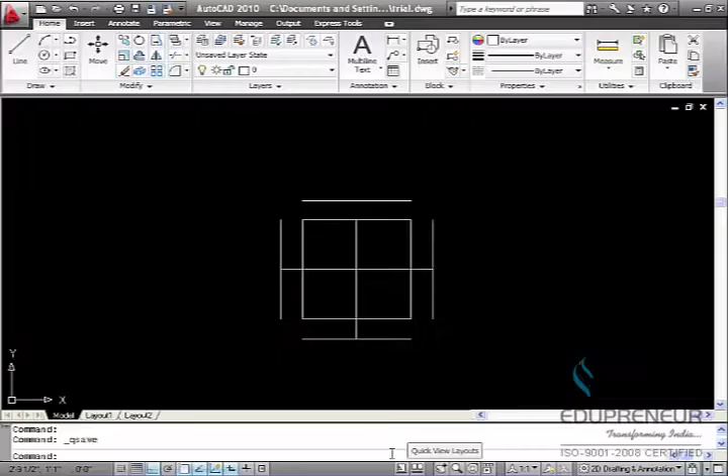Here we'll learn the next command, which is zoom. Zoom is located at the status bar in your AutoCAD window. When you click on zoom, this icon will display several options on the command window. They are all center, dynamic, extents and some others.

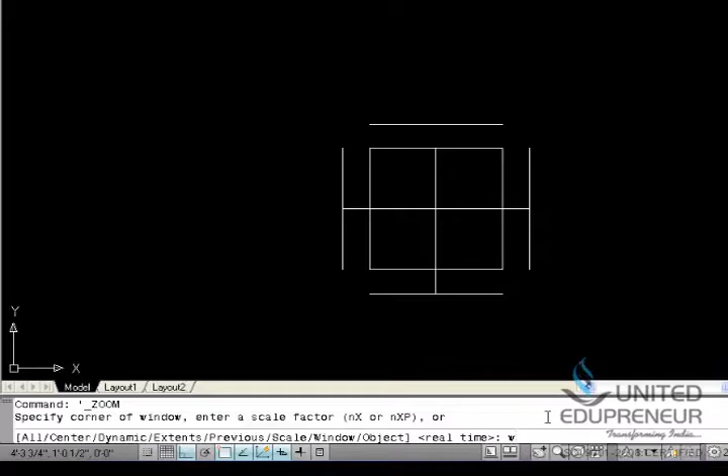Here for window we'll select W and then press enter. It will ask you to select the first corner of your object and then drag it throughout the object's end and then click. The window will get zoomed like this.

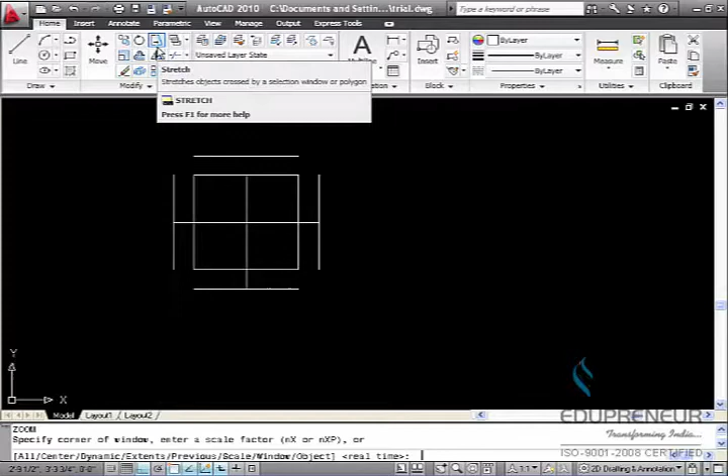We can set the command. We can also give the command Z for zoom, then W for the window, and then select the window by dragging over it. And it will get zoomed like this.

The next command that we will learn is pan. Pan is also located beside zoom on the status bar. This command lets you click in the window and will take the object anywhere you want, like this.

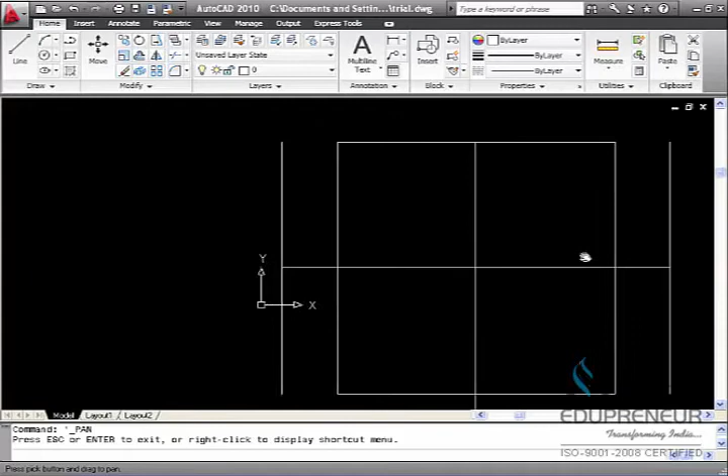We can do the same thing using scrolling on the window. And while you are using the pan command, click with the right mouse button to see this menu. This can be done, as I've said, through the window scroll bars too.

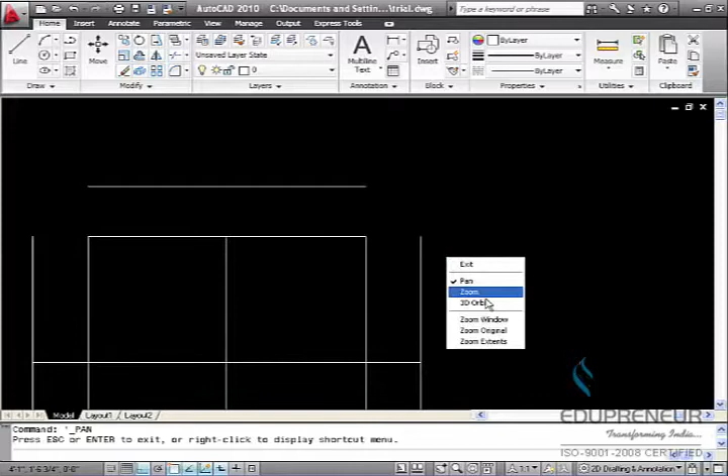I have clicked on zoom original. The same way I can click on zoom window too, and by clicking on exit will exit from this view.

The next command that we will learn in this tutorial is explode. That will explode the selected object.

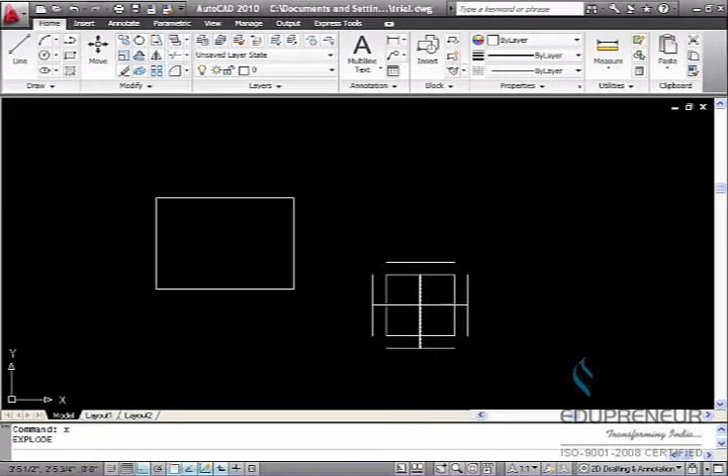If you have created a rectangle or a polyline object and you want to explode it, then you can use the X command, press enter. It will ask you to select the object and press enter. And as you can see, all the lines are separated from each other.

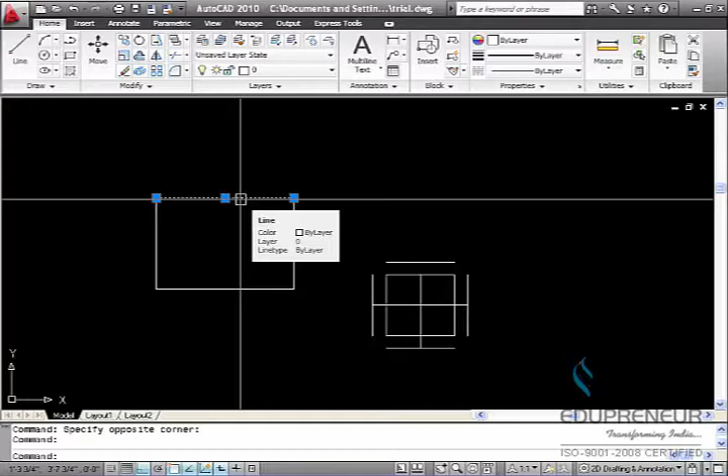We have seen zoom tool, pan tool and explode in this tutorial. We'll learn some more commands in our next tutorial. Thank you.

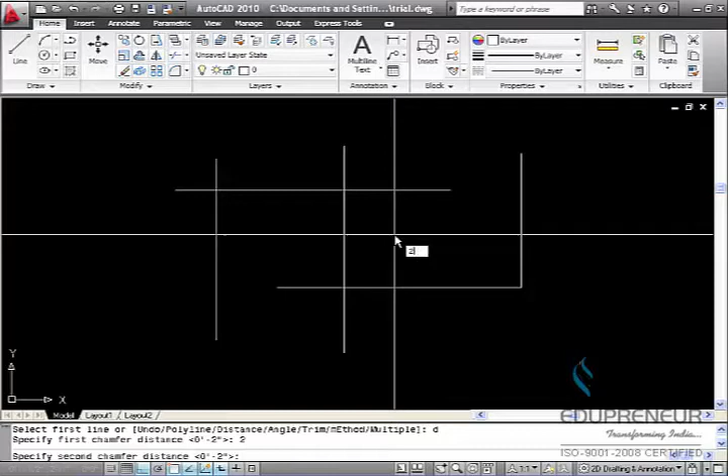The command is CHA, then D for distance, then 2 as the measure for the first chamfer distance, second again will give 2, then select the first and then the second object. We can see the angle between these two lines.

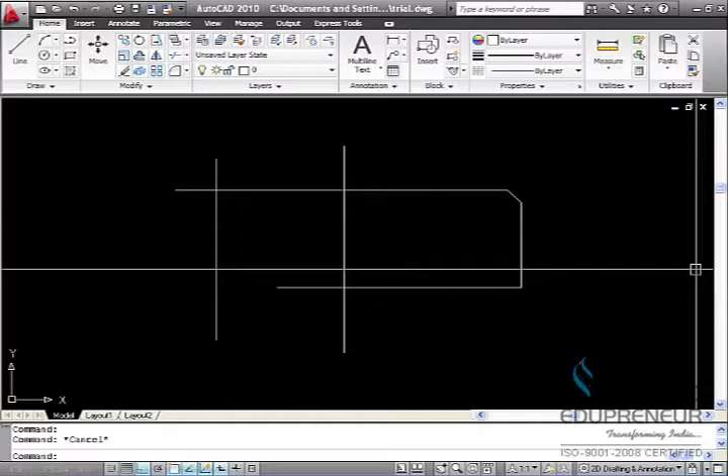The rectangle command also displays chamfer as its option. When we press REC in the command area, it will display chamfer there. After selecting C, we'll have to give the chamfer distance.

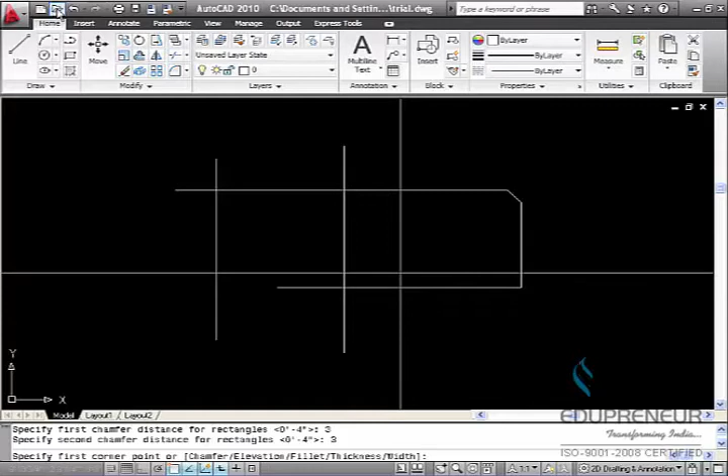Let us set it 3 and then again 3. It will ask you to select the first corner in your drawing area and then the second, and the rectangle has been drawn.

The next command is fillet. The fillet command connects two lines, arcs or circles with a smooth arc of specified radius. It adjusts the length of the original lines or arcs so they end exactly on the fillet arc.

If the polyline option is used, you can apply fillet to an entire polyline or remove the fillets from a polyline. The command for fillet is F.

Here I'll give radius as the available option. It has 3 radius. Now select the first object. Here it is. And then select the second object. And the fillet has created the circular angle between these two lines.

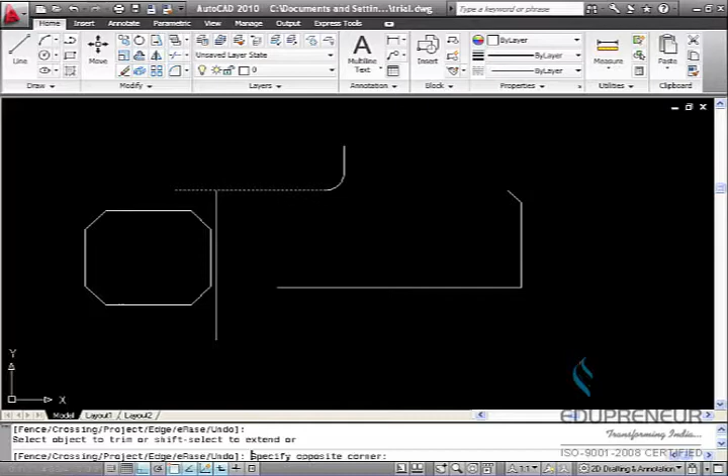We have learned chamfer, fillet and trim commands in this tutorial. We'll learn some more commands in our next tutorial. Thank you.

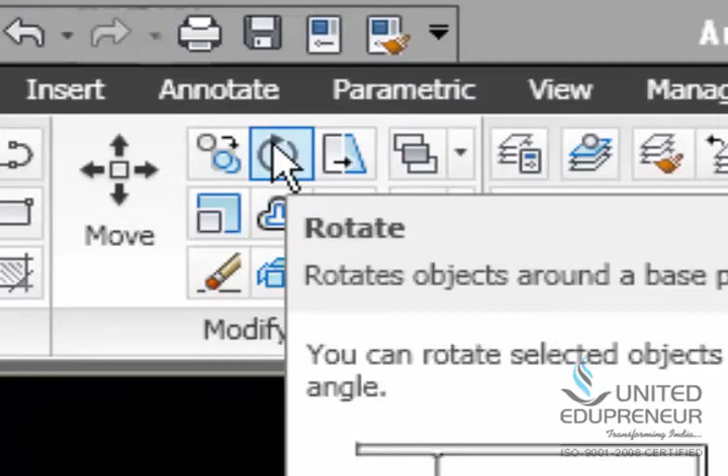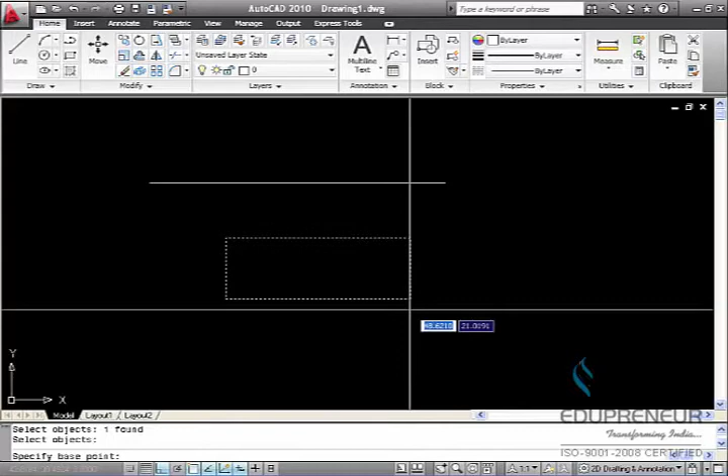First, select the tool of rotate from the modify toolbar or type the RO command on the command prompt. Then select the object and then, as per the instruction, click right side or press enter. Now specify the base point.

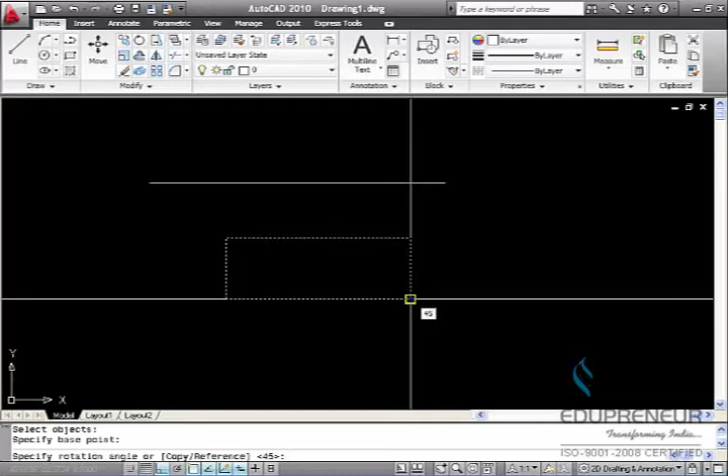And then if you want to rotate it as per the angle, give it the angle as 45 and then press enter. That object will get rotated at its 45 angle.

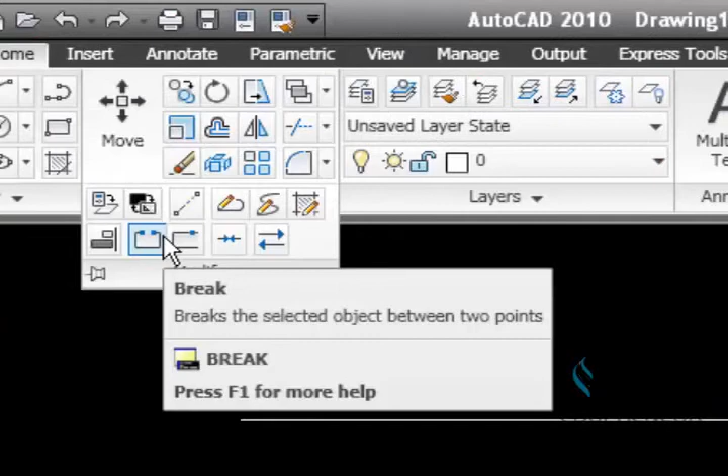Now the second command that we will learn is break. The break command is located here on the modify toolbar. It will break the selected object between 2 points. It will create a gap between 2 specified points of an object. Here we have drawn a line to break.

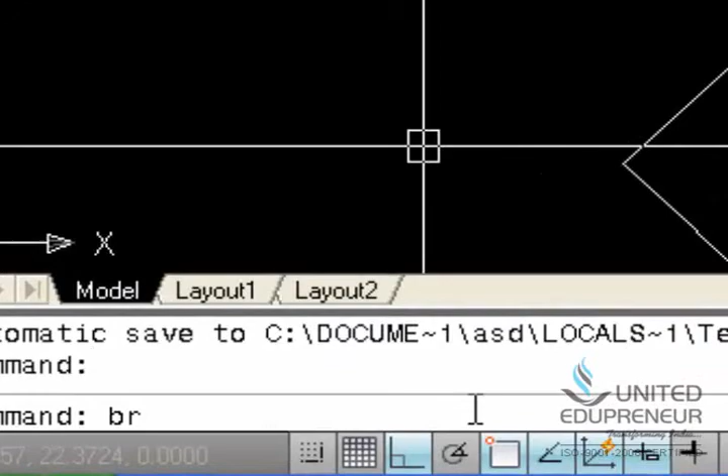Here for break the command is BR. Now select the object at first point and specify the second point. And we can see that the line has been broken between those 2 points. The single object is divided into 2 objects now.

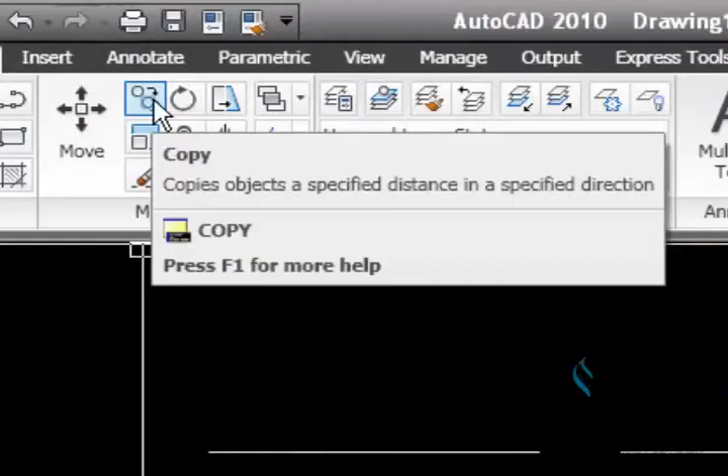The next command that we will learn here is copy. Copy is located on this modify toolbar. It will copy the object with a specified distance and in a specified direction. The copy command is used to duplicate one or more existing drawing entities at another location without erasing the original.

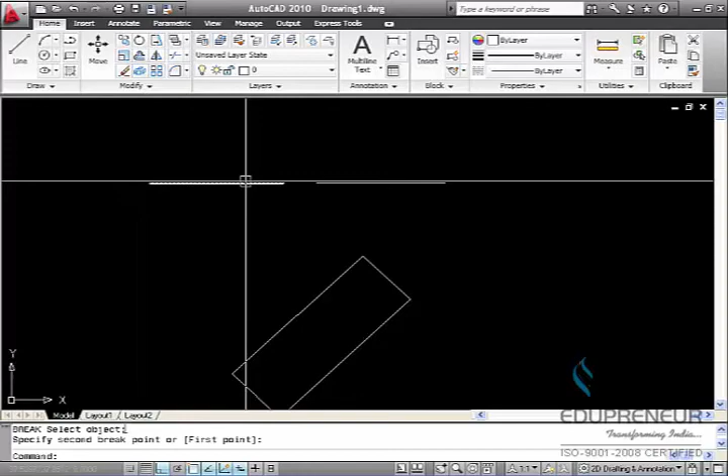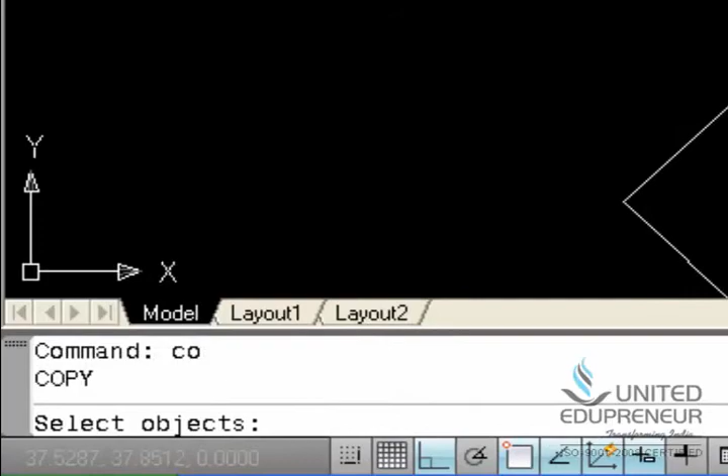The command for it is CO and then press enter. Now select the object. As we have the rectangle over here, we'll select that and then press enter or right click. Now it will ask you for the displacement. We'll copy it from any of this point.

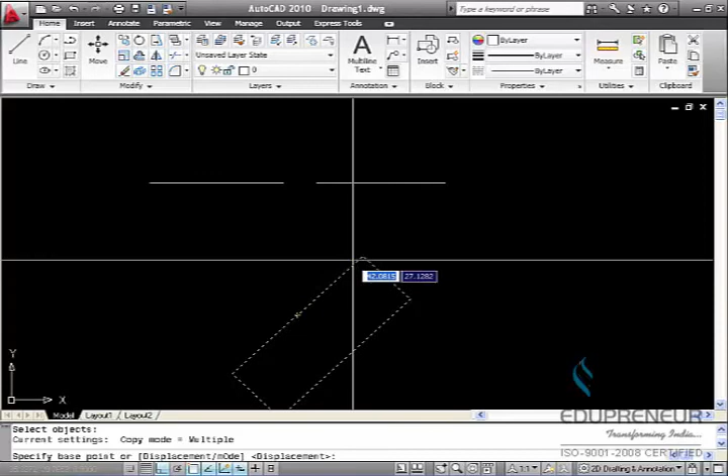This many copies we have created. Use any of the entity selection method you want to, because copy can select and copy any specified vector from the drawing area.

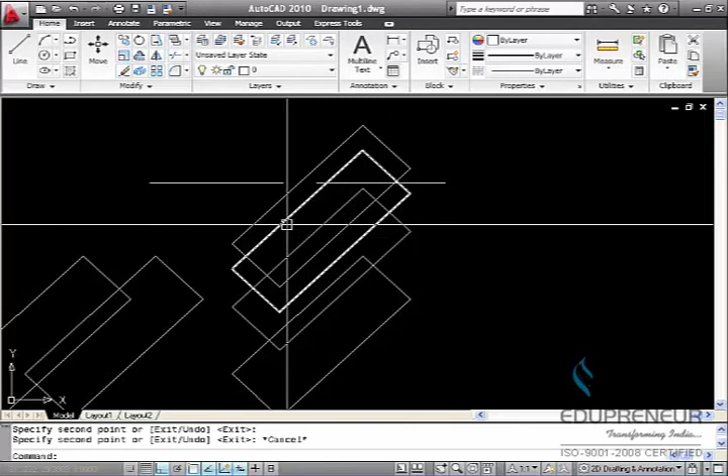We have learnt 3 commands here: rotate, break and copy. We'll learn some more commands in our next tutorial. Thank you.